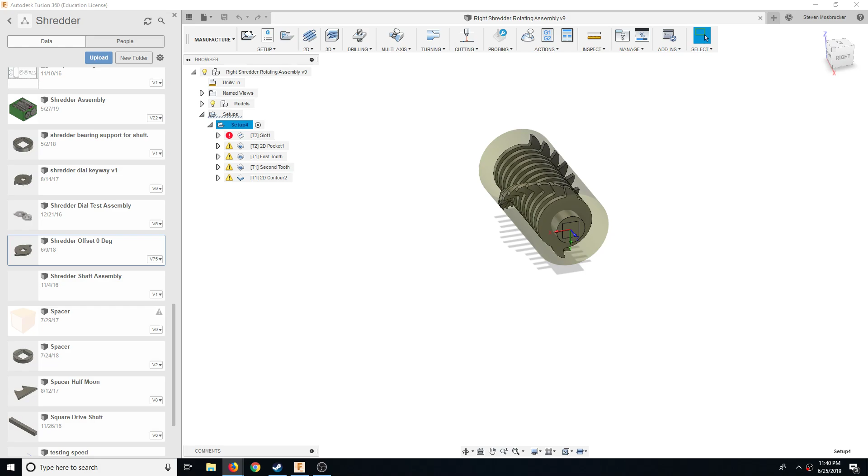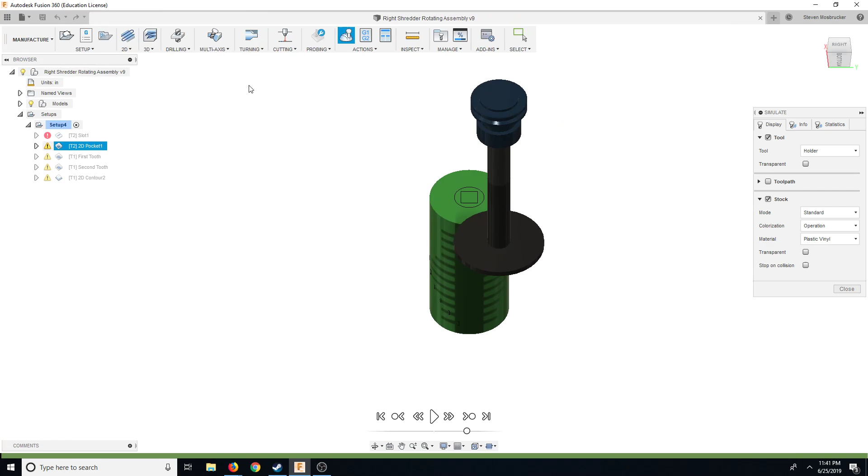So today I am working a little bit on what this would look like if it were on the milling machine itself. So here is something to kind of get an idea. So let's go ahead and close this, and let's go ahead and show you. So again, this is the shredder. And let me go ahead and hide the model.

And let's have it. Whoa, this is laggy. That's strange. I think it's because of the recording, the OBS. That's strange why it's so laggy.

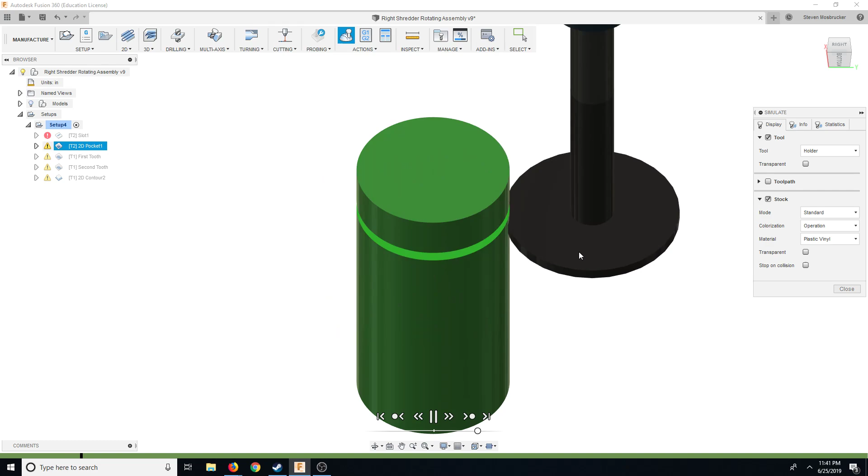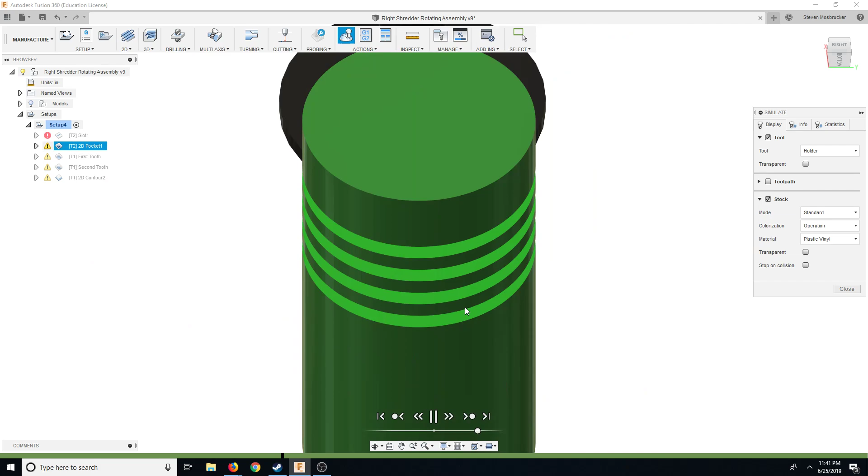So yeah, basically this is the side cutting mill, and I actually just bought one. So let me go ahead and also show you which one I bought. So as you can see, this goes around and profiles out those holes. And then these here are the 1/4 inch blades left, and it goes around. And it does a 33 thousandths depth per pass. So basically in 3 passes you're pretty much done. So it just goes around, and then finishes up.

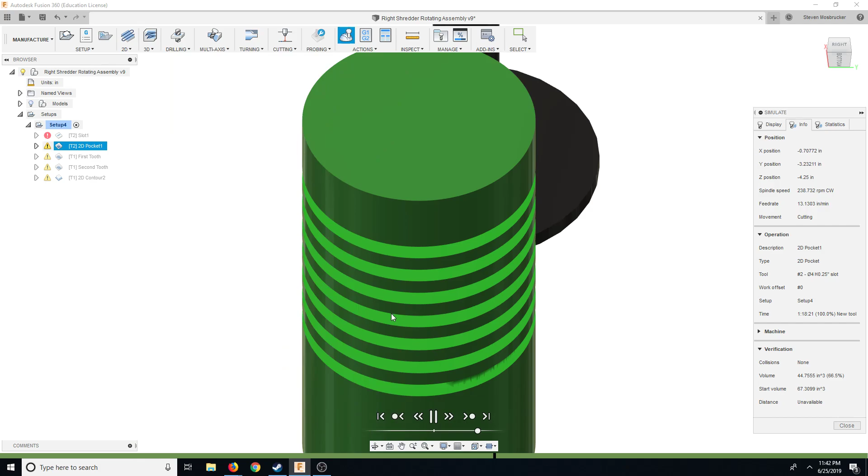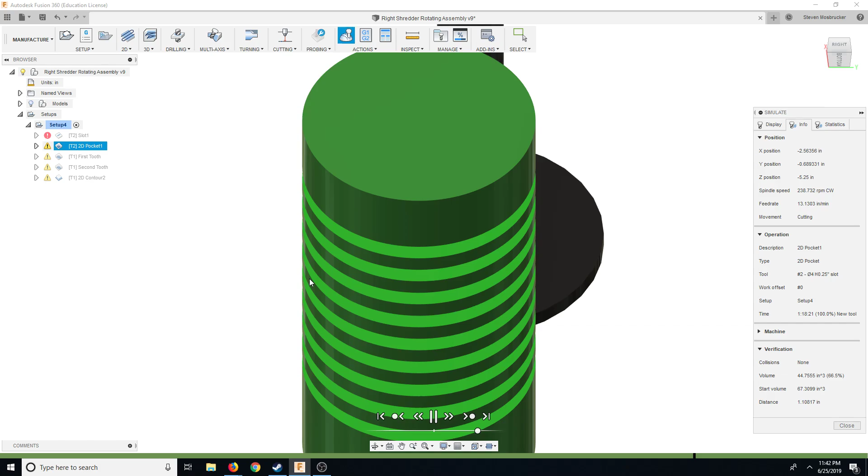So total it's 3 passes, but it takes a really long time because these you have to actually move very slow surface feet. I think it's like 250 surface feet per minute. And what we're going to use is a 4-inch cutter with a 1-inch arbor that goes through it. So if you take 4 inches, divide it in half, we have 2 inches. If you take 1 inch and divide it in half, you have half an inch. So 2 inches minus half an inch, that's 1.5 inch depth of cut. And so that basically is from the middle outward.

And what we need on this guy is only like 1.1 inch depth of cut. So we're gonna have 0.4 inch extra. That's unfortunate, but basically what I did, I bought a cheap one. I bought a Grizzly. Probably maybe not the best idea, but I'm gonna try it. It's a carbide tipped for 50 bucks. So if I break it, doesn't really matter, and it's a 1 inch arbor, very similar to pretty much everything.

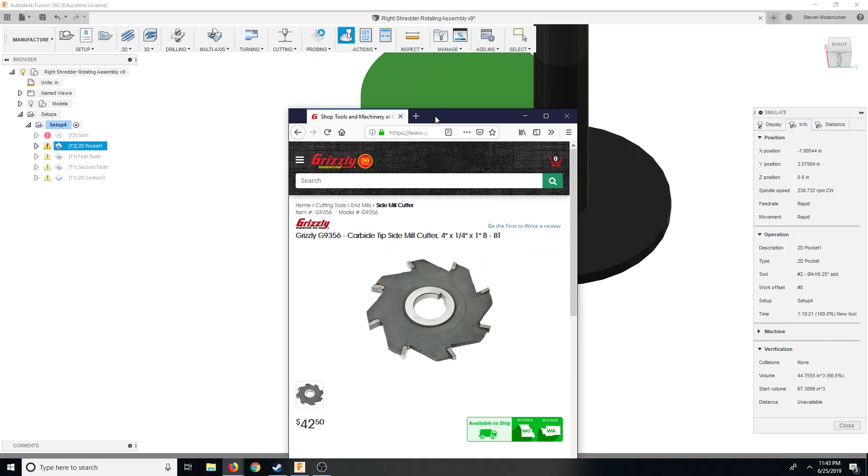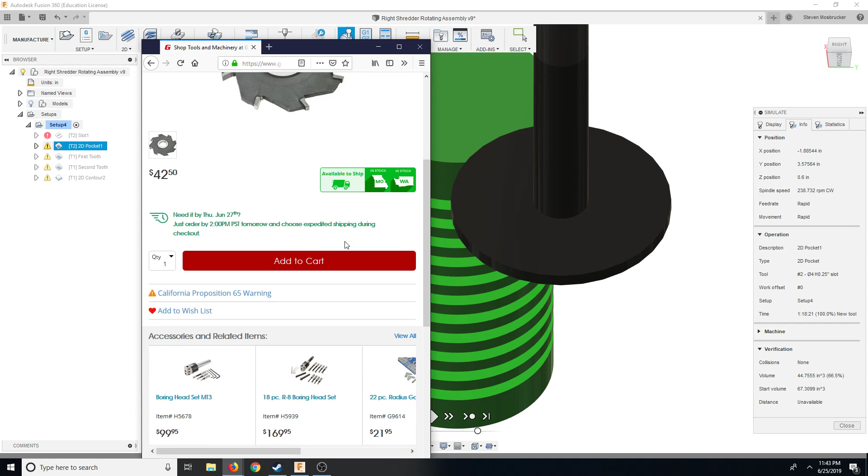So yeah, it's a 4 inch by 1/4 inch, right? Because this has got to fit. This is a 1/4 inch slot in here, and hopefully this is really close, because otherwise I'm gonna have to step up on it. So we'll see what the exact dimensions are. If the exact dimensions are not right, then probably return it and get a smaller one, then I'm gonna have to do 2 slots, right? That's not what I would like to do, but still. So this guy is an 8 tooth.

So there are some other ones online, such as some that are like 80 bucks, like this one from Exact Tooling. Here you can see, this is a 4 by 1/4 by 1 side milling cutter, 22 tooth. This is about double the price. I guess it would also work. Maybe I'll try this one next, but here it says 0.28 height, which is not that cool. So it's a 6mm width, which is smaller than 1/4 inch. Oh, 6 inch. What? That doesn't make sense.

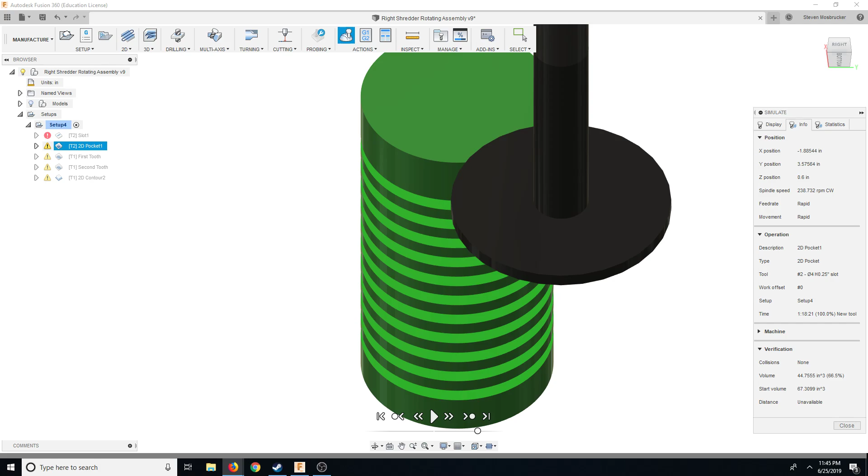Anyways, so basically in order to get this to work, I'm going to try this on the Tormach at the shop or the Jet manual mill at the shop. And basically what I have to do is I'm probably going to go without the keyway at first and just do a pure friction fit.

So basically what I'm going to do is I'm going to have a 1-inch arbor here. I'm going to have probably a 1, whatever this is. I'll mic it and figure out what this is. And then I'm going to lathe the rest of it down on steel as smooth as I can get it. And then basically it's going to have a shoulder. And then with that shoulder I'm going to put this in here so that the shoulder presses up

against this guy. And then on the back side I'm going to thread it up until this point, let's say, and then I'm going to put on a nut as tight as I can to shove it up against that back shoulder, and then I'm basically going to hold it there like that. So this is actually going to be like an inch and some change arbor. Obviously I don't want to lose anything, but the bigger I make that arbor, the better it's going to fit. So that's kind of what I'm thinking right now.

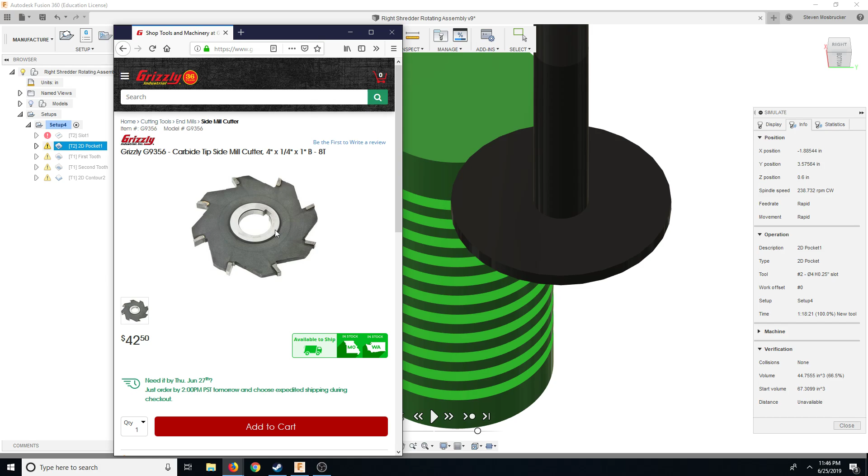So put it in here, and as you notice, this thing's going to have to be extremely long because I do not want to flip it over because the positioning is going to be an issue. When I flip it over, positioning back to the same height, I'm going to machine this top part, but still positioning might be an issue. So this guy is going to have to be a 7-inch for this, and then a 10 to 12 inch if I get a bigger one, if I'm going to do the full 12-inch to fit in the flat rate box. So this is going to have to be a really, really long guy.

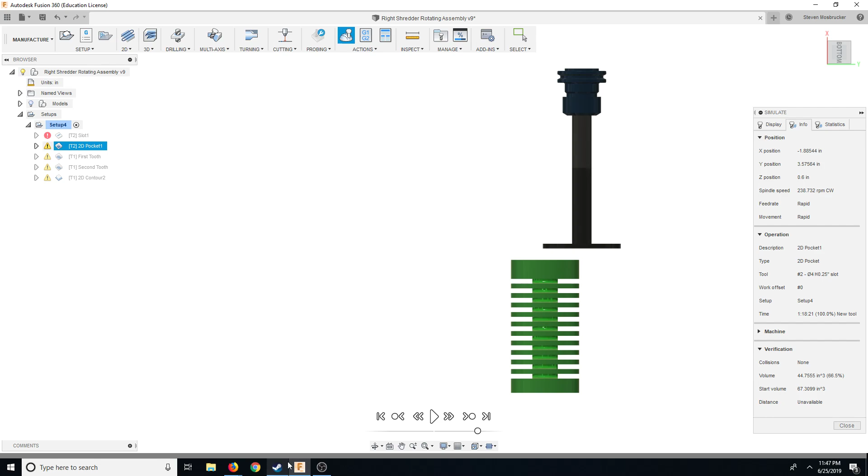So I'm worried about it not fitting in the tool holder on the tool changer at the shop, or also struggling to fit in the tool changer when we build this thing. But it might, because if we get around to doing a tool changer, it'll be an umbrella style, so that probably should be okay. Alright, so let's go ahead and continue on.

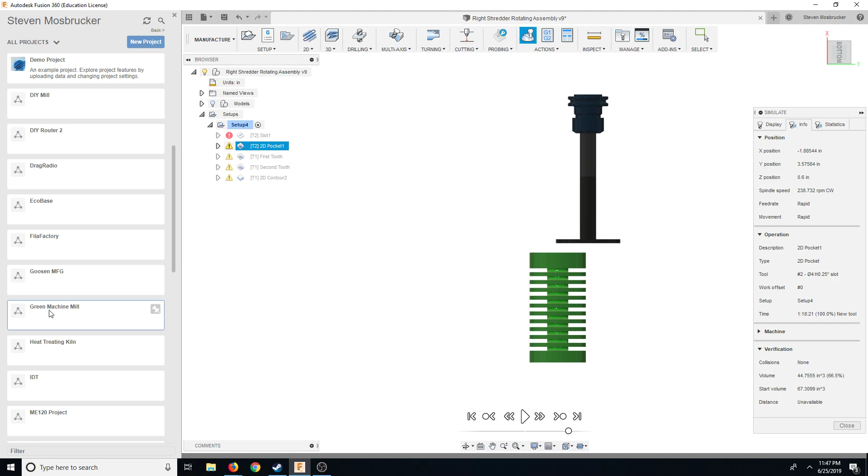So let's go ahead and open up what we were doing before. I should have probably had this open before, but that's okay. No, it's not this one. It's the green machine mill. So what we're going to do is we're going to put this guy on hold, and we're going to start to design the gantries. And then what I'll do is, off that website, like I said, I'll pull these guys off and import them in, because it's very time consuming. I showed you guys how to do that in episode 5, which I'm uploading right now.

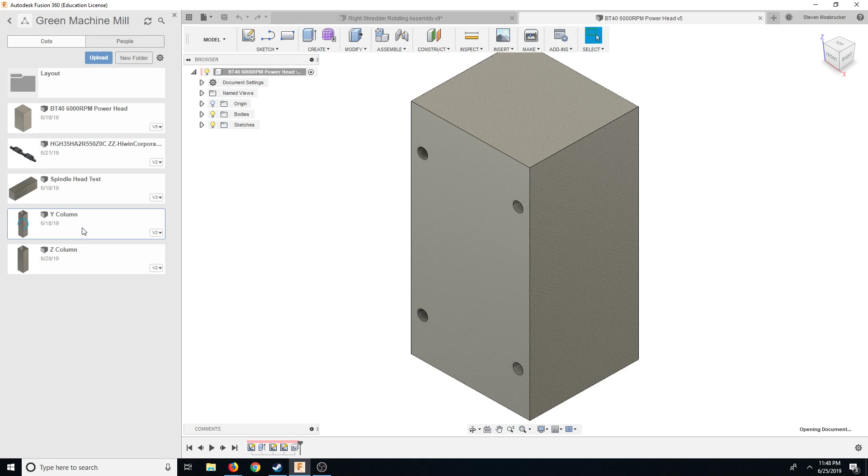So here's the Y column, here's the Z column. And one of the things I wanted to also check was using I-beam. One of the things that I like about the I-beam is that it's a little bit heavier, and you have a little bit more choice as far as these boxes. Let's look at Online Metals to see what options we have. So we want some steel, and we want to view all types. There's a rectangular tube. I thought I just saw it. There's one right there.

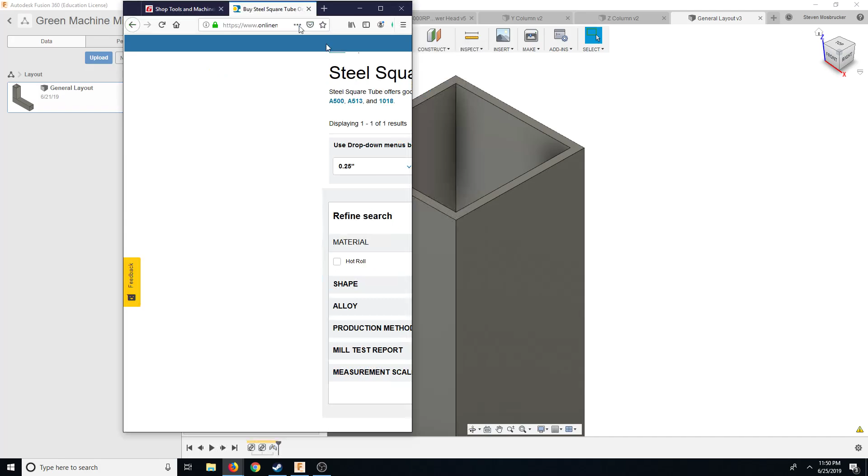No. Okay, hot rolled, fine. Oh, okay, so see, this is very, very small wall, but let's see. Shape, we already got that. Square tube, alloy, that's not important. Wall, okay, so height. Oh, the biggest they have is 5-inch, but what kind of wall? See, they only have 1/4-inch wall. That's definitely not thick enough. Obviously, it's not wide enough. Let's put this over here, square tube. Let's try these guys.

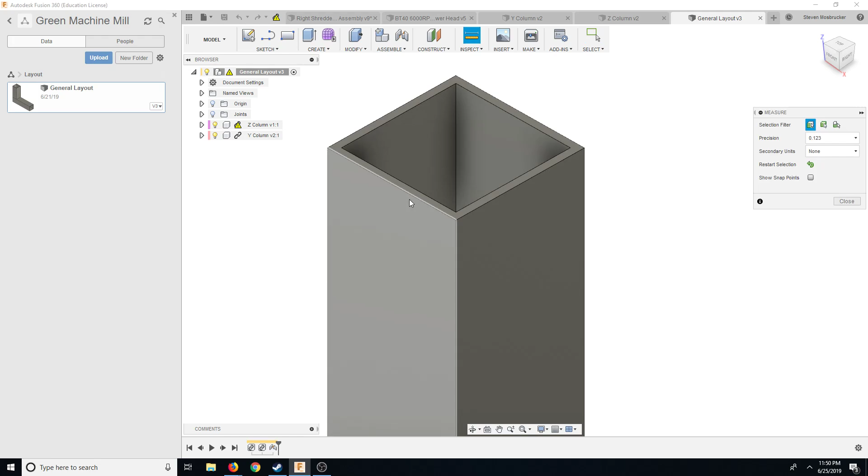So they got some beam. Oh, there we go, square tube. Okay, so what we're looking at right now is some 9-inch. I did not think that they would have 9-inch. But then again, 9-inch is the absolute. Okay, so they do have 1/2-inch wall. So let's see, what would something like that cost? That's the short one. Let's get this one, 38 inches. So yeah, about 500 bucks. All right, so let's look at the beam.

I think this is height by width. So we're looking for, like, you see these are too wide to fit inside the vise. So we would have to drop it down to, oh, you can't even get it small enough. Or that might be how tall it is. Because we don't actually need it to go in the other way. We just need it to go in this way. So this is probably the width here. So if that's the case, we could do this.

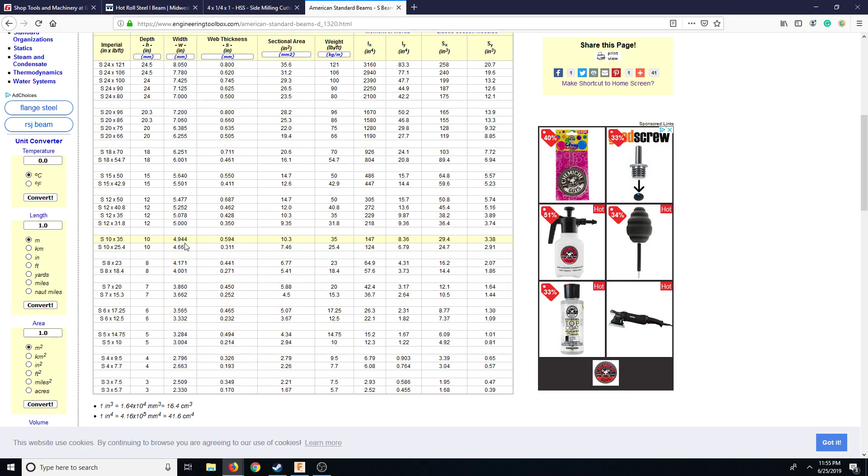This is millimeter. Standard beam. So this is a standard beam here. Standard S beam. This is all A36 stuff. Imperial inches, pounds per foot. So depth H. So we need W to be less than 9. So here 8. Depth is way too high. Depth is 24 inches. We want it to be as short as possible. Almost square. Well, it's almost double. Everything's almost double. So what is this then?

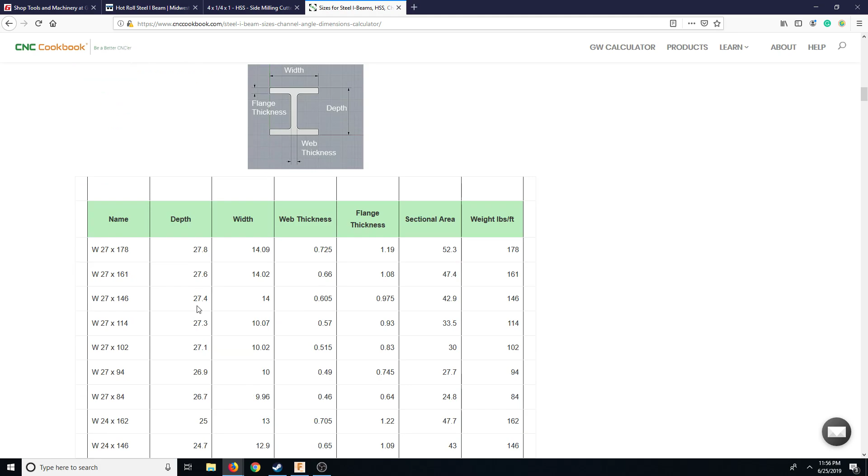Oh, this is CNC cookbook? Wow. Okay, so here's some standard. So standard I-beam, wide flange. So yeah, that's what we want. Wide flange, smaller depth, and a decent web thickness. So this is a wide flange. Is this inches or millimeters? I think this is inches. But obviously the width can't be more than 9. But still.

Okay, so we are coming down here. Here we go. So it all really depends on what I could find. Most likely my supplier is going to be Sims Metal Management because I can get it for cheap. So I can build this thing for cheap. I don't have to get it shipped or do any of that kind of stuff. But other than that, we have what? 8 here, 12? 8, 10. Okay, now we're basically getting pretty much where it's square.

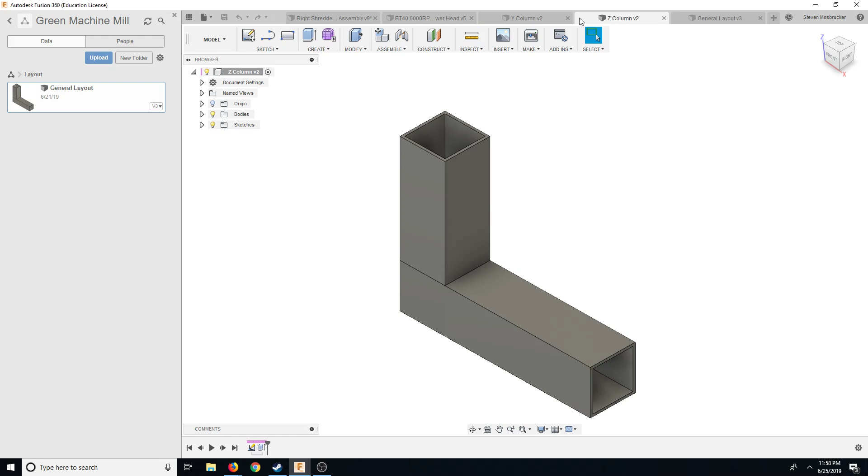Yeah, so pretty much the closest thing is this one. 8 by 35, 35 pounds per foot. And web thickness is about 0.31, which is not that big. Because we could go up till close to 9. Eight, 10, 35. It's 100 pounds per foot. So this guy, well, obviously we'll want similar weight. So that's 38 inches. And that is the Y column.

It's 183 pounds and 38 inches long, so it's about 3 feet. 181 pounds, right? 3 feet. Is that first column W? No, first column's depth. Okay. This is fine here too, actually. 3 feet. That's 200 pounds. Over ½ inch. Okay. So W8 by 67. Where's my Trello?

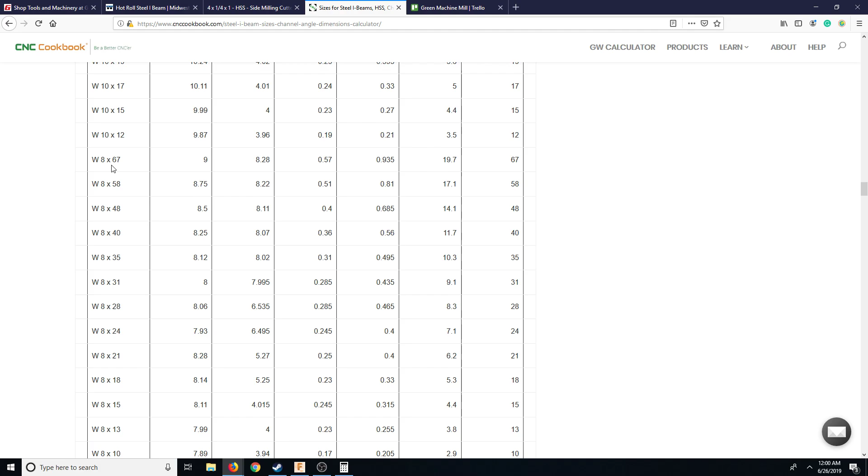So let's see if we can find this. It all really depends. Pretty much what I'm limited to is what they have. W8 by 87. W8 by 67 or 87? W8 by 67. Another thing that we could do is we could cut the I-beam down on the width. It's not a problem. So it could be wider, but have a shorter flange, and then we just cut it down to the side. That'll also work.

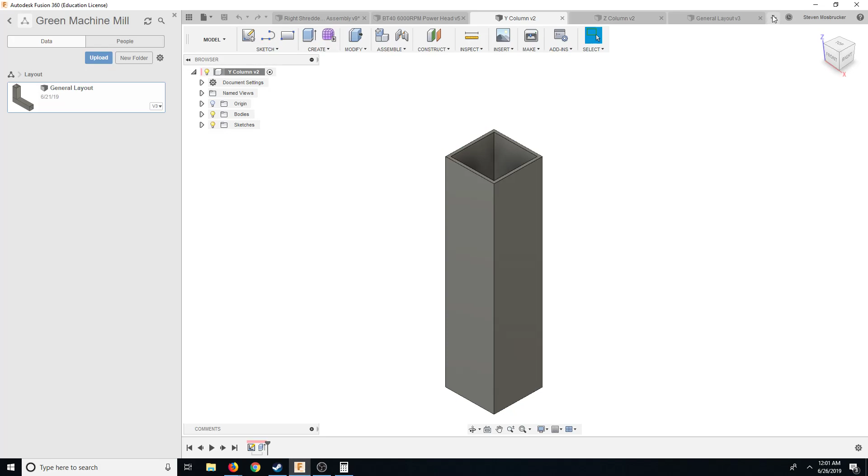So maybe I'll have to do this next week. I'm actually going to be off of work. We have a mandatory shutdown. So I could go by Sims Metal Management and look at what we have to work with for cheap. Okay, so W8.

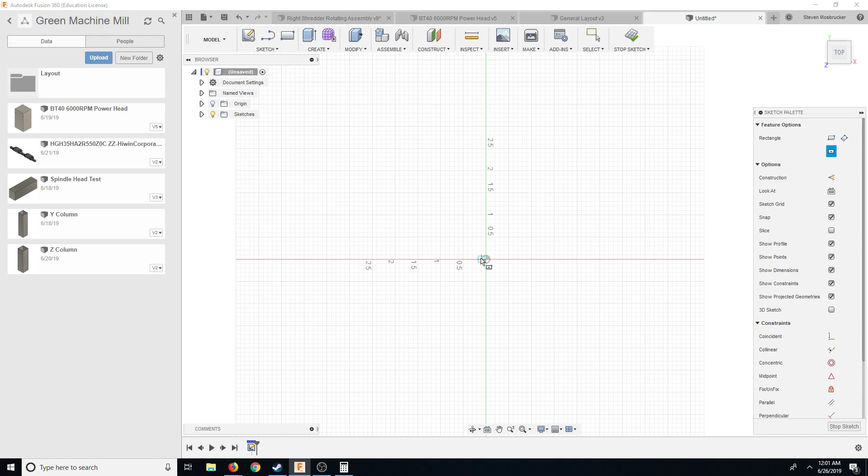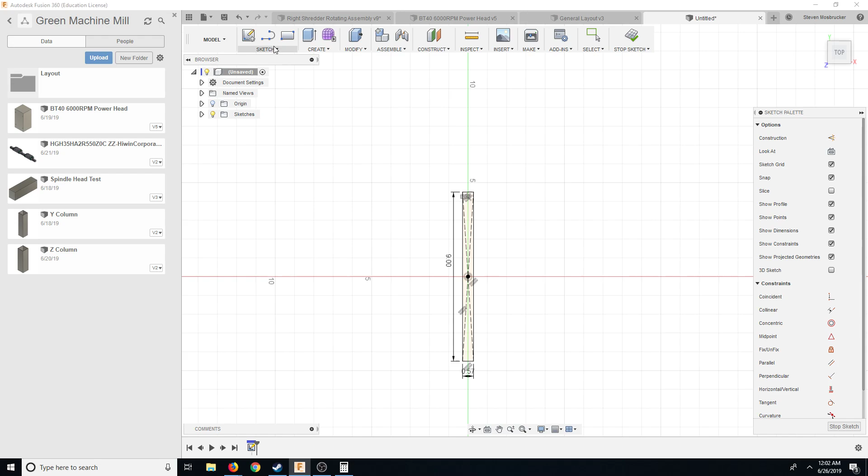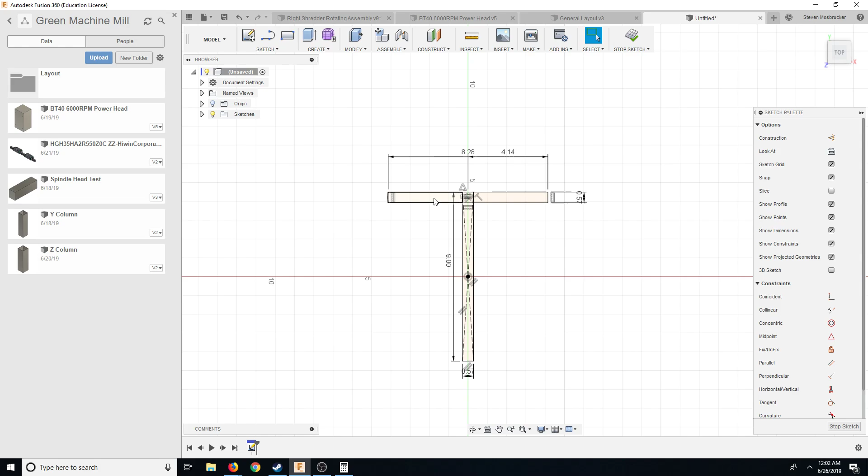Then basically this is 8.28 divided by 2. 8.28, and then this is 0.57. And the same deal here. Or we could just draw a line, mirror it. Oops. It'd help if I drew my line. What? It'd help if I drew my line parallel.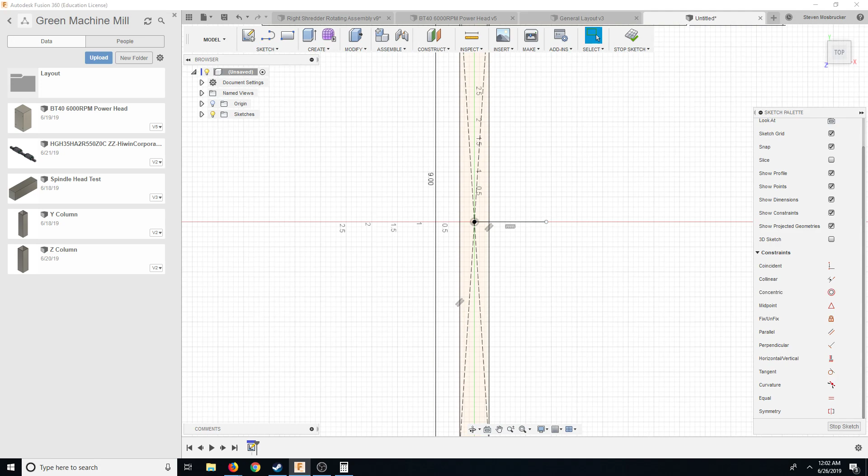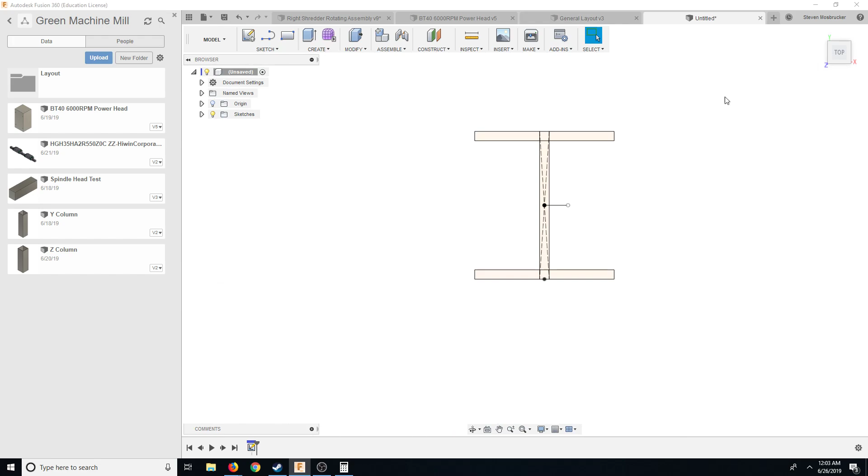Okay, we got 8 minutes to make this happen. Sketch, mirror. Okay. And so now I'm going to call this, well, actually I'm not going to call anything yet. So let's look at general layout.

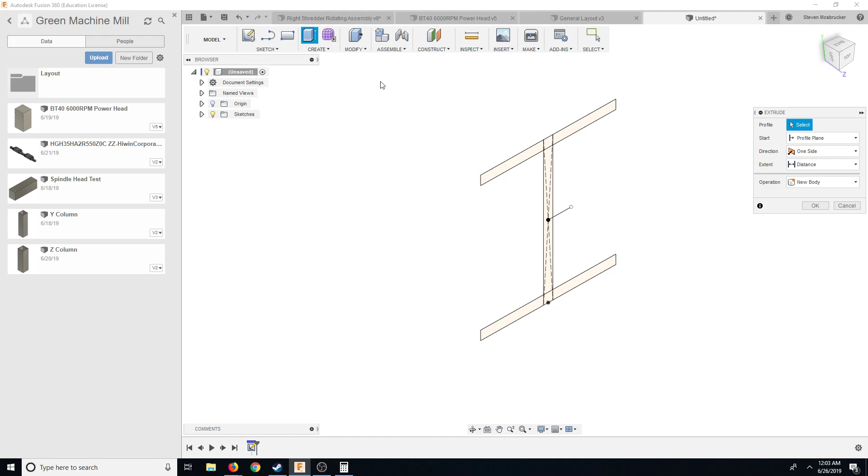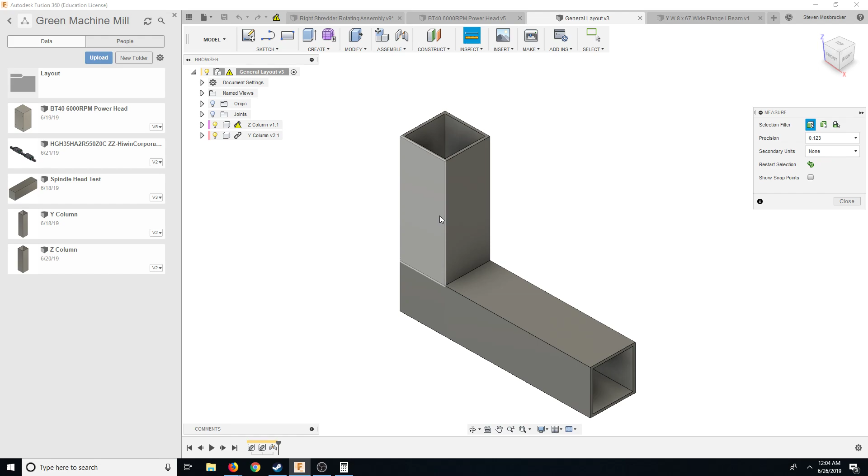This is 38 inches. So let's do that first, 38 inches. Let's call that Y. So we're going to call that Y, W8 by 67 wide flange I beam. Okay, now let's go ahead and go back here. Let's look at this one. 22, and then let's call this Z. Oops.

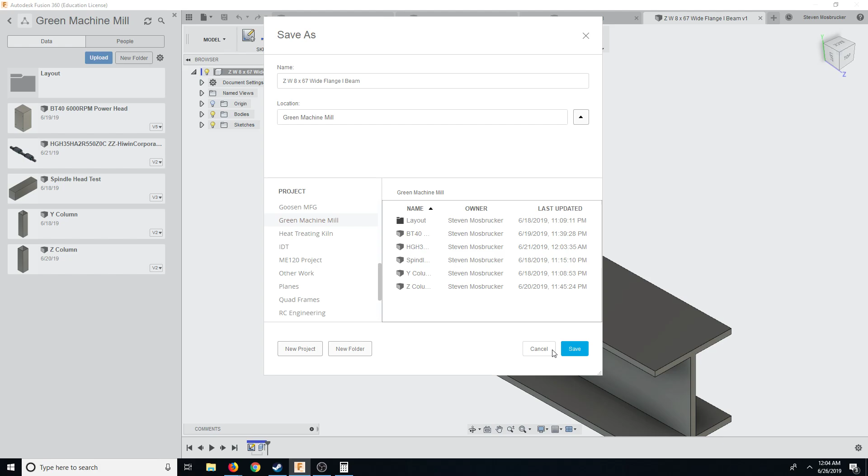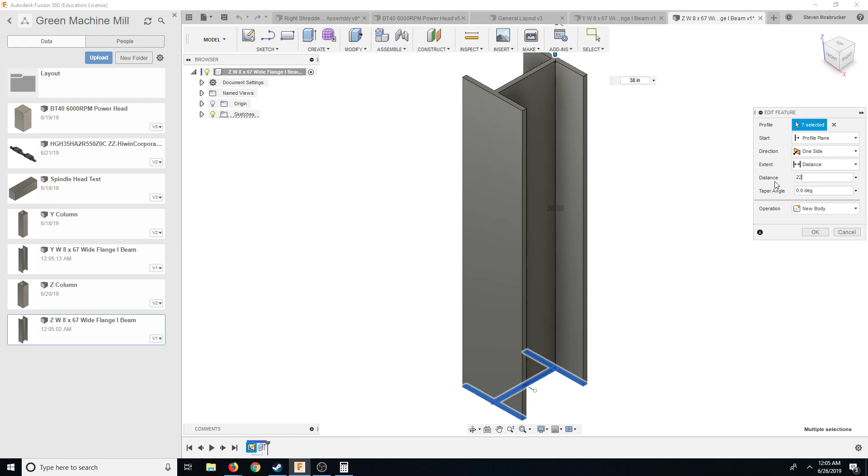File, save as Z. Where is it saving? Oh, well, that's not good. Did they patch that? So now it doesn't do that? It's weird. Okay, well this is again supposed to actually be for the Y. The Y is 38, but this one's supposed to be 22. Save that. Save this one.

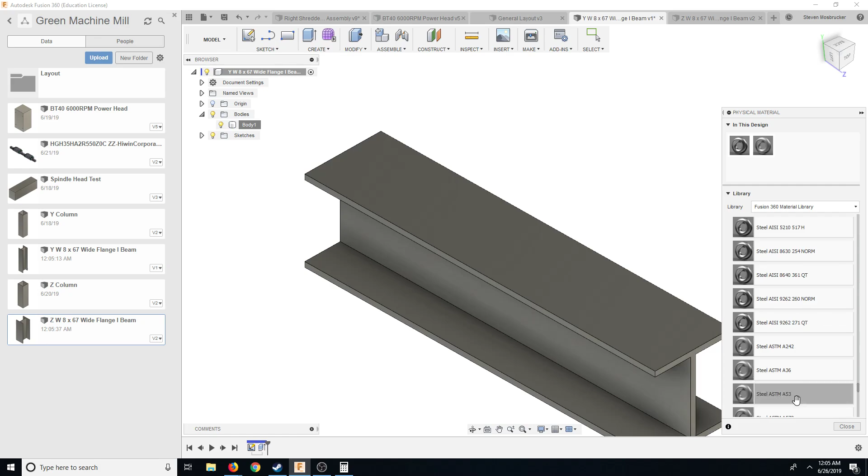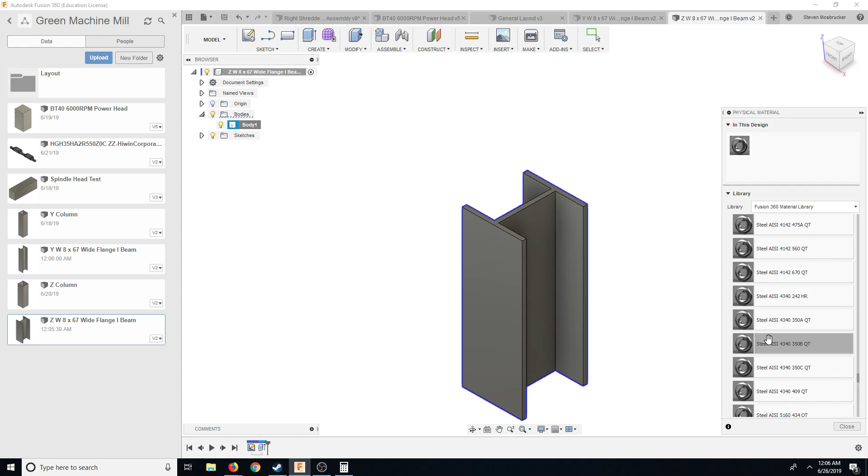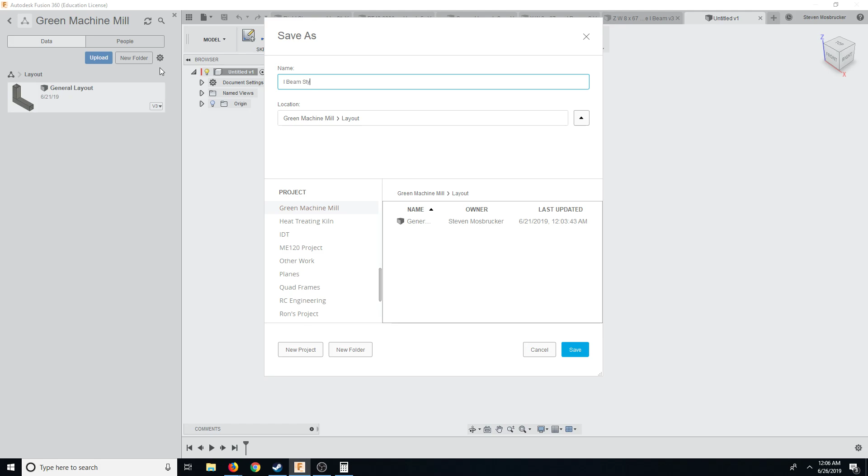And material we know is A36. Metal. I think it's all the way at the end after the alloys. A36. Close. Save. A36. Save. Okay. Okay. Oops. Okay,

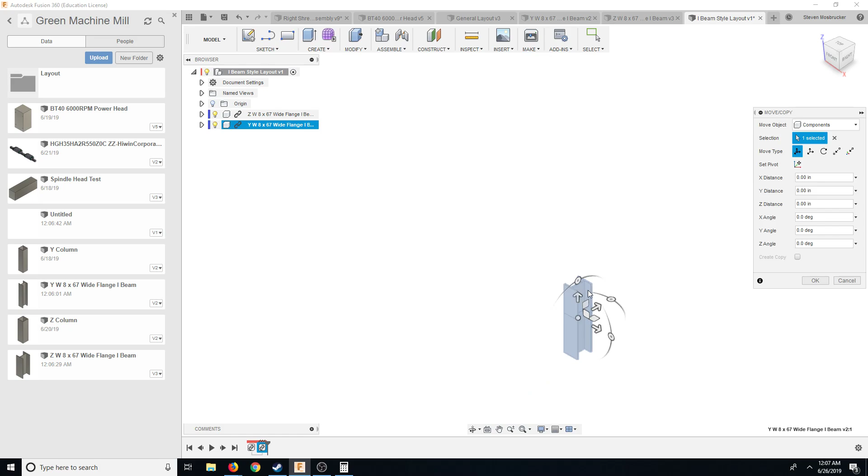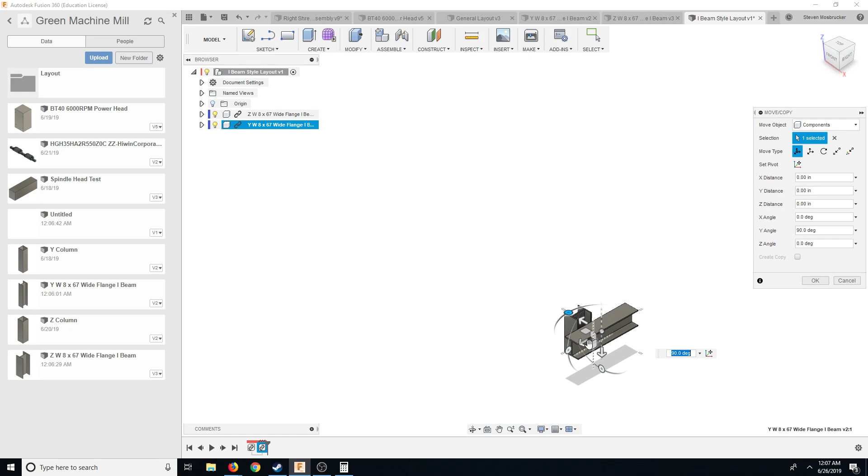so now what we're going to do, back it out, and let's look at the weight here. Put in Z, put in Y, rotate it down, rotate it this way. Actually, it's supposed to be rotated this way because, if you look at our view cube, this is the front. And so let's go like that. Let's joint it. Right back corner.

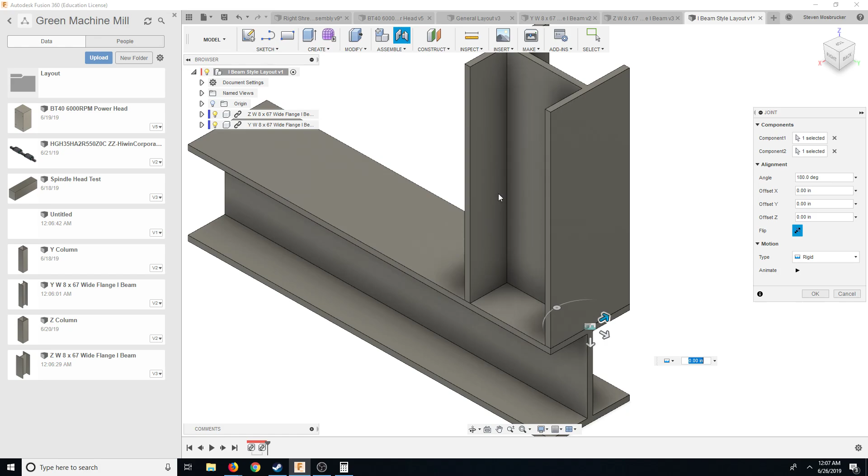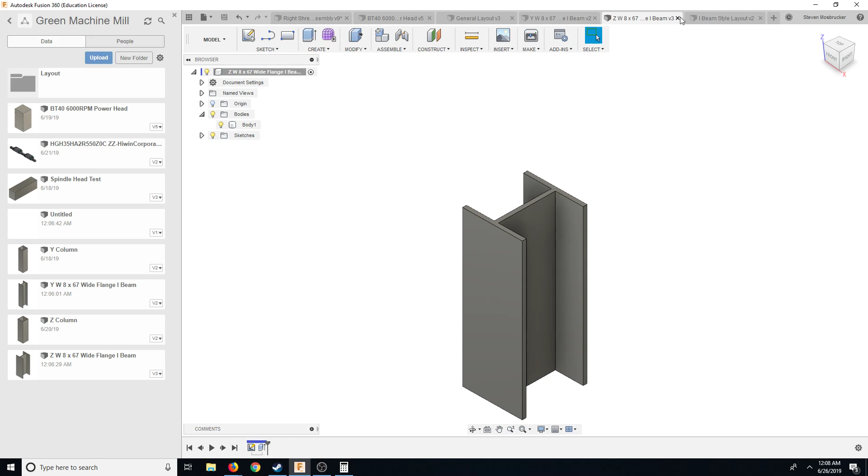This also makes it very easy to bolt up here or weld or do whatever. Obviously with welding, chances of it tweaking out are pretty high, but doing it this way is better. So there we go. And now this is a very sturdy table here. Okay, so now what is overall weight? Let's save it. Let's close this one. Let's close this one. Let's keep this one open. General weight 4628. Ooh, it's lighter.

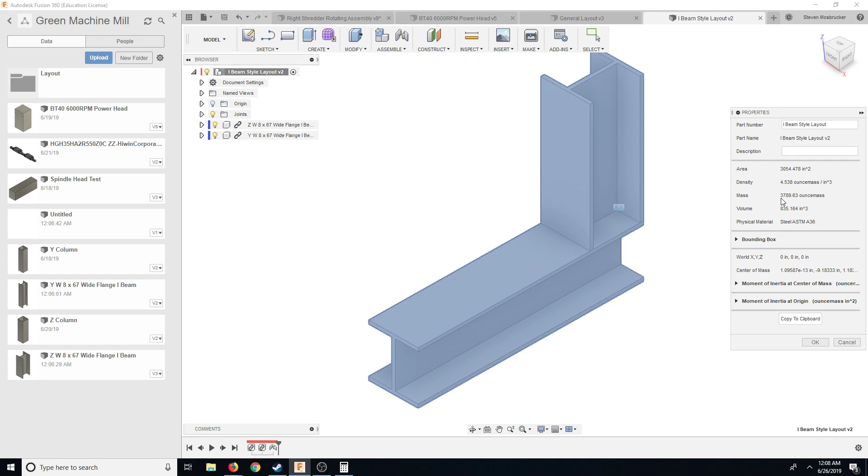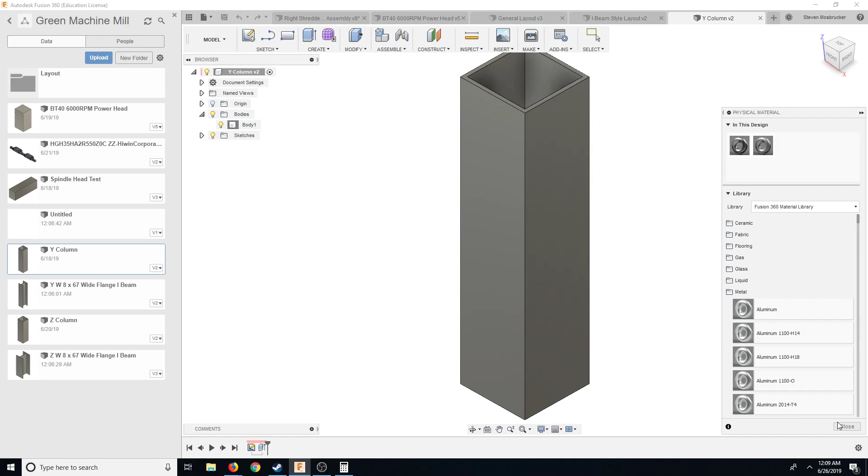Huh. I wonder if that's because these are different materials. These might not be the right material here. No, it is the right material. Okay. So this is quite a bit heavier, but obviously we're going to struggle to find this thickness, and we're going to pay dearly for it.

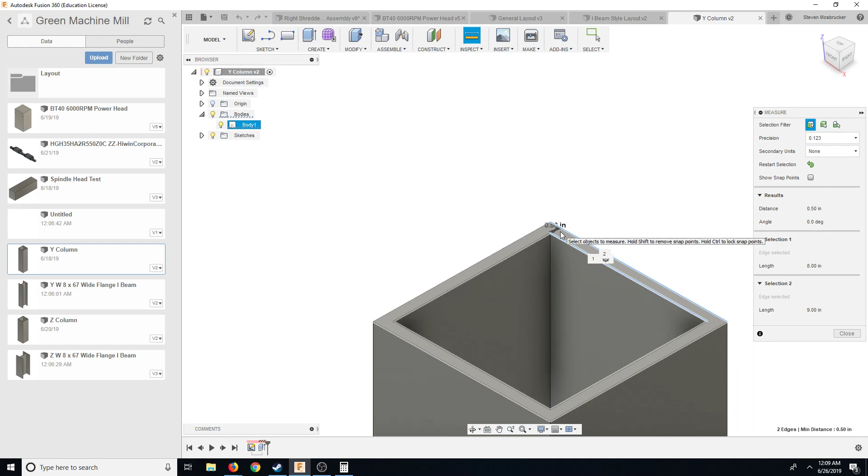So we'll see. Basically what I'm probably going to do is, before the next video, I would like to check at Sims, maybe on the way home or on the way out, and figure out what I have to work with, so I could go from there, because that's where I'm going to get the best deal. My inside guy is there, so I get the best deal that way.

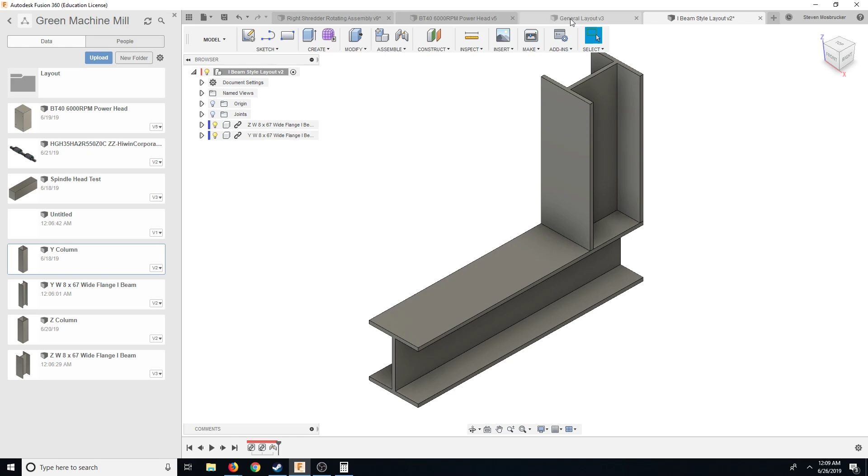But now we could see the two different ways. So here is the beam style, and here is the general layout. Beam style, general layout. So we'll see what we have to work with. We'll probably work with either. This one might be easier because it's going to be a little bit cleaner. We could run stuff in here. We could have this thing bolted up here.

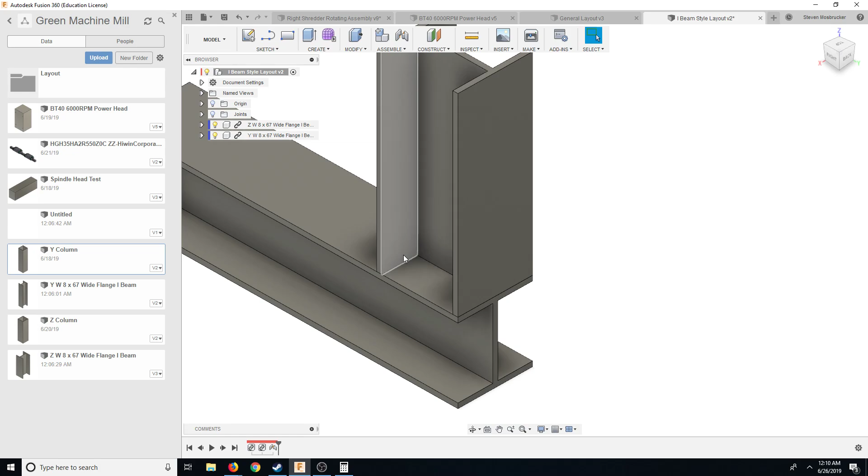The only thing that is kind of an issue is bolting up stuff here. This might need to be welded together, and then bolted together here, and then welded along here. Weld along here. And then keep some water here so it doesn't distort this front face, because otherwise we got to go in and reshape all that stuff.

Okay, so that's pretty much it for this video. This has been Steven from Legit Tech Tutorials and the Green Engineers, and I'll let you guys know what we really have to work with so we can go further and save some money on the stock material and spend it more on the mechanics and mechanisms that drive the machine to actually make good parts.